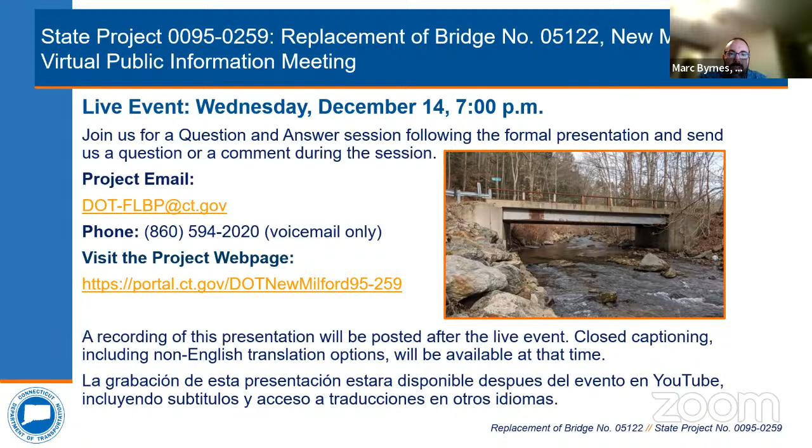The goals for tonight's meeting will be interacting with the project team, explaining the federal local bridge program, design managed by state or DMS program, welcome remarks by the town of New Milford, introductions of the project team, and a formal presentation of the design process, which will explain the condition of the existing bridge, to define the purpose and need, and to recommend a viable proposal. Please keep in mind we're only at 30% design.

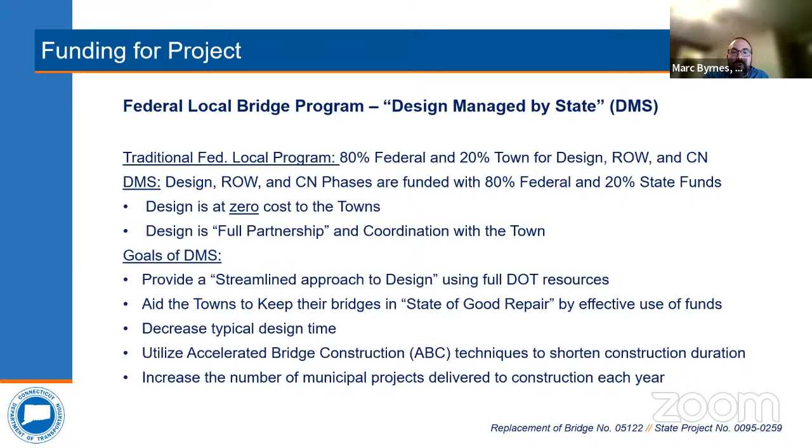We started the DMS program to provide a streamlined approach to design using our DOT resources, which include our consultant liaison engineers and our on-call designers. We also created it to aid the towns to keep their bridges in a state of good repair, to decrease typical project design time from upwards of 5 years to 24 to 36 months, and to utilize accelerated bridge construction techniques to shorten construction duration, and to also increase the number of municipal projects delivered to construction each year.

I'll now take remarks from Jack Healy, Public Works Director and Town Engineer from New Milford. Jack? Good evening. Yes, this is Jack Healy. I'm the Public Works Director for the town of New Milford, and it's a pleasure to be here tonight. This is a program which is very beneficial to the town.

Just as an example, the town has 4 projects currently with the state, either with the 80% funding or the current DMS program. This is one of 3 with the DMS program. We have finished 5 bridges in the last year, and we have 8 bridges in the queue right now to be constructed. So it's important to the town that we're able to use dollars from the federal and state government, and the town doesn't have to fund those dollars.

The Van Car Bridge was recently temporarily repaired due to a safety inspection. We did that with the intention that we knew that this program was coming and we were going to participate in it and completely repair or replace the bridge in the upcoming years. This is a great cooperative effort between DOT and the town. We appreciate their agreeing to do this for us, and we look forward to finishing this project up in the next few years. Thank you, Marc.

Thank you, Jack. I'll now introduce the rest of the project team. On the far left of the screen is Bart Sweeney, our Division Chief of the Bridge Unit. To my left is Derek Lassard, Principal Engineer. To my right is Andrew Shields, the project engineer for DOT. On the bottom portion of the screen is Zachary Garano, right-of-way coordinator. And then from Close Jensen Miller, who is our department liaison and acts as our extension, is Mike Brady, project manager, and Dan Carnein, project engineer.

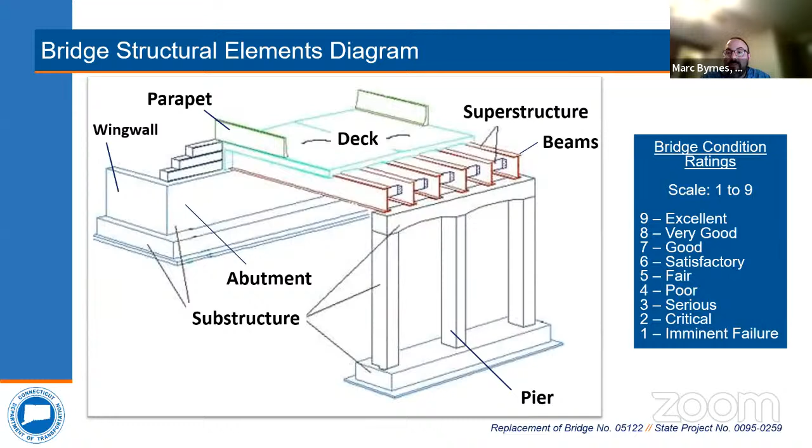Bridge rating conditions rate on a scale of 1 to 9, with 9 being excellent condition and 1 being imminent failure. The department also uses a 0 to recommend full closure of structure. I will now turn it over to Dan Carnein so he can begin the formal presentation. Dan?

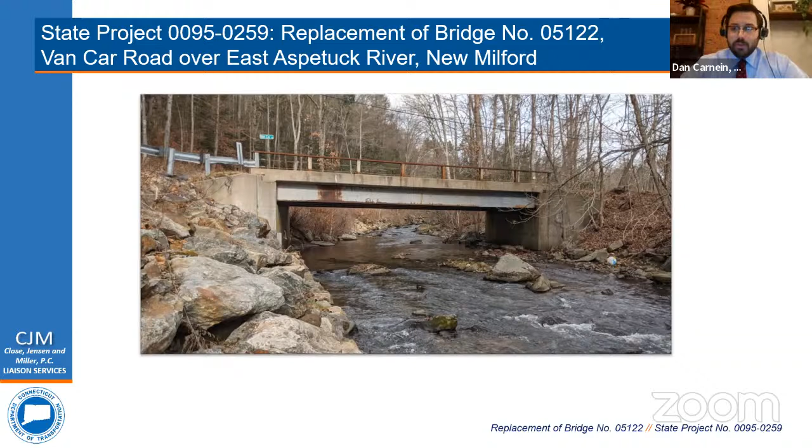Thanks, Marc. So as Marc said, I'm the project engineer for this project from Close Jensen Miller. So I'll be talking to you about the project specific information for project number 95-259, replacement of bridge number 5122. So the bridge carries Van Car Road over the East Aspetuck River in the town of New Milford. The bridge is 0.6 miles west of the intersection with Route 202, and it's adjacent to Paper Mill Road.

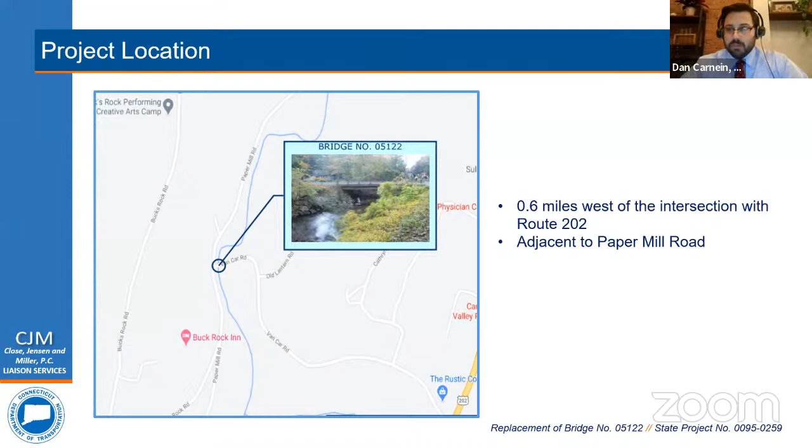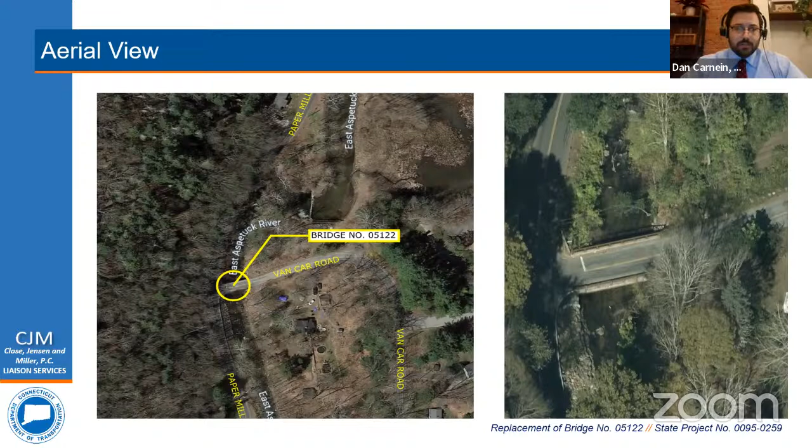The existing bridge itself was built in 1957, and that bridge consists of steel beams, a reinforced concrete deck, and that is supported by reinforced concrete abutments and wing walls. The bridge has a 53-foot total structure length, a 22-foot approximate curb to curb width, and then an average daily traffic of 840 vehicles per day.

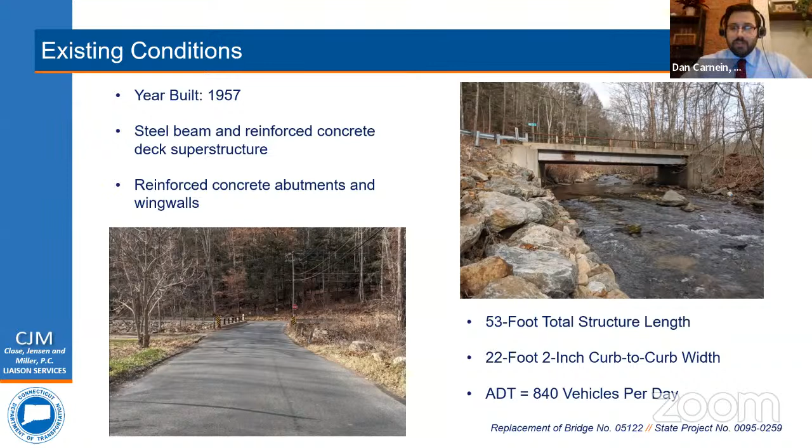There are existing overhead utilities at the site. They currently span the structure on the north side or upstream side of the bridge along Van Car Road, and then they also run along Paper Mill Road to the west. We will be coordinating with utility companies throughout the design process to ensure that there's no disruptions to service throughout the project.

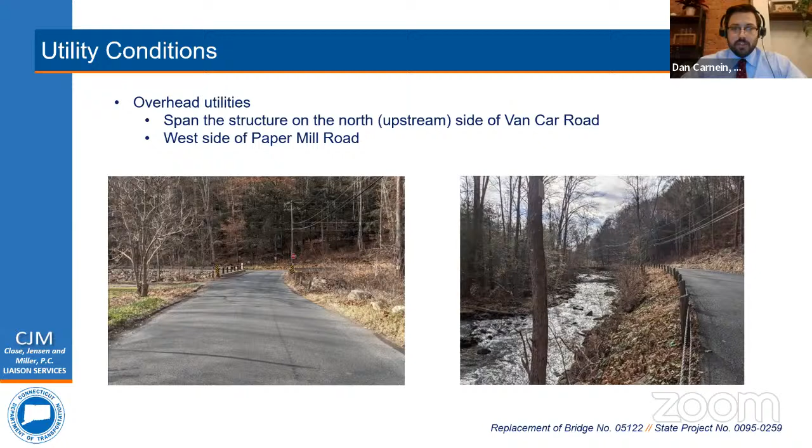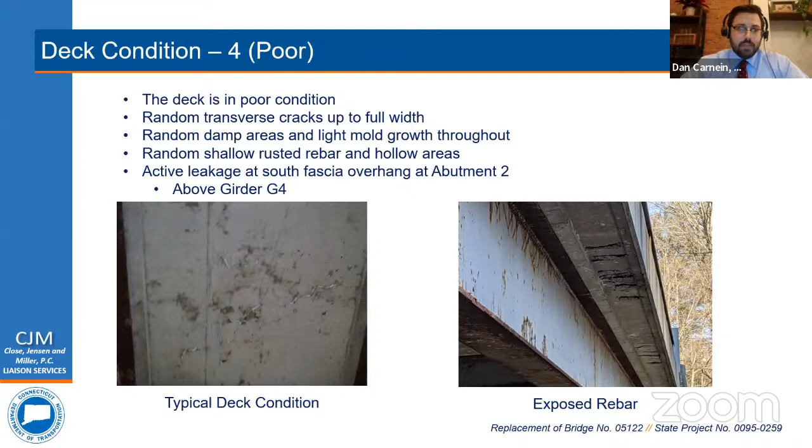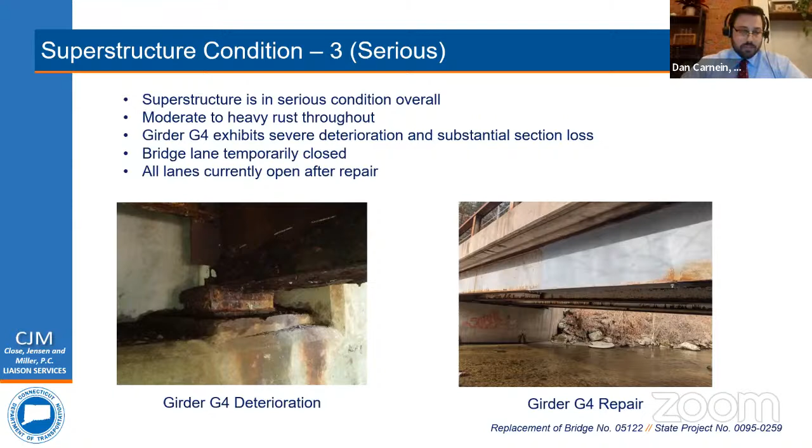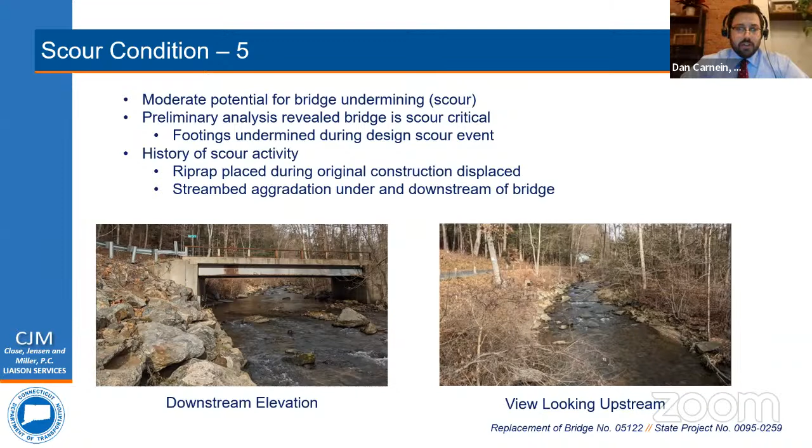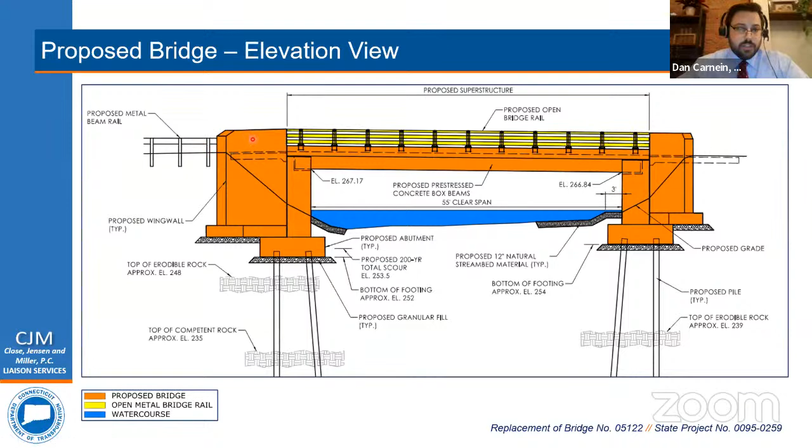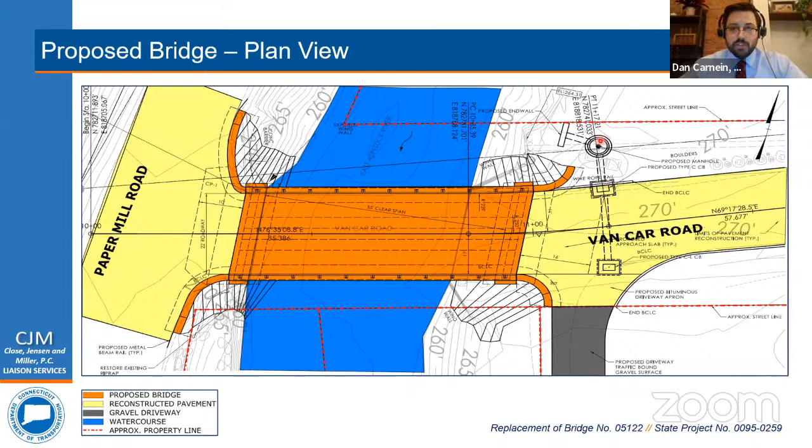As part of this project, we will be slightly widening the bridge structure. So we will be going with a slightly longer clear span of 55 feet for the proposed bridge. As a result, we will need to reconfigure the driveway adjacent to the bridge located at the southeast corner. So portions of that driveway will be reconstructed with new bituminous concrete pavement driveway aprons, along with gravel section. And then lastly, we will improve the drainage at the site by installing new drainage structures, including catch basins, and then tying into an existing drainage system that's already out there today.

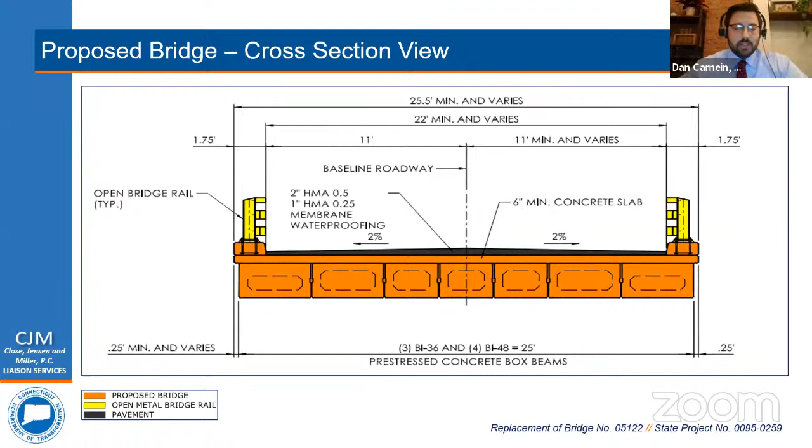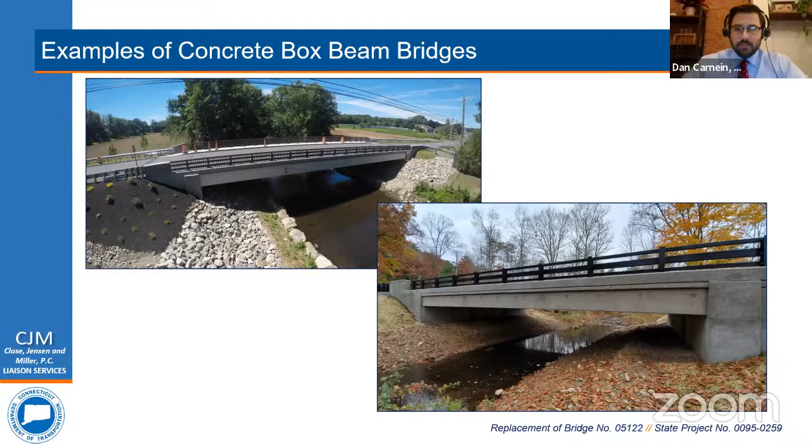Construction for the Van Car Road Bridge, Bridge 5122, will utilize detours and closures of both Van Car and Paper Mill Road. Van Car Road will be closed for one construction season, or approximately 6 to 8 months. And because the bridge is so close to Paper Mill Road, we will have to temporarily close Paper Mill Road to perform construction activities within that intersection. It was determined that these activities should be limited to an approximate 3-month window over the summertime to help limit disruptions to local traffic and buses in the area. The signed detour route could be used by all types of vehicles, trucks, buses, cars, people not familiar with the area. That signed detour route will include Paper Mill Road, Route 202, Elm and Bennitt Street, along with Wellsville Avenue.

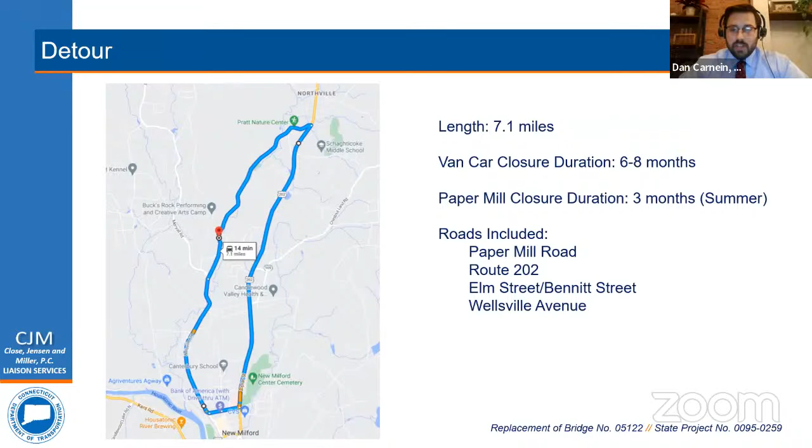We're not proposing any concrete or bridge structures outside of the existing street line. And we also want to keep in mind that these impacts are from preliminary design plans, and that these impacts could change as design progresses. We will go a little bit more in depth on the rights-of-way process. But as design progresses, we will also be coordinating with individual property owners.

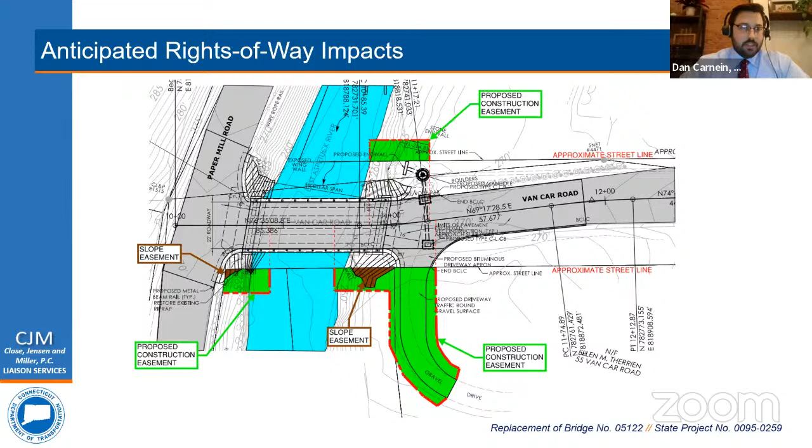For this project, we will be getting all the required environmental permits at the local, state, and federal levels. So we do anticipate a New Milford Inland Wetlands permit, a flood management certification from the state of Connecticut, along with a U.S. Army Corps of Engineers general permit.

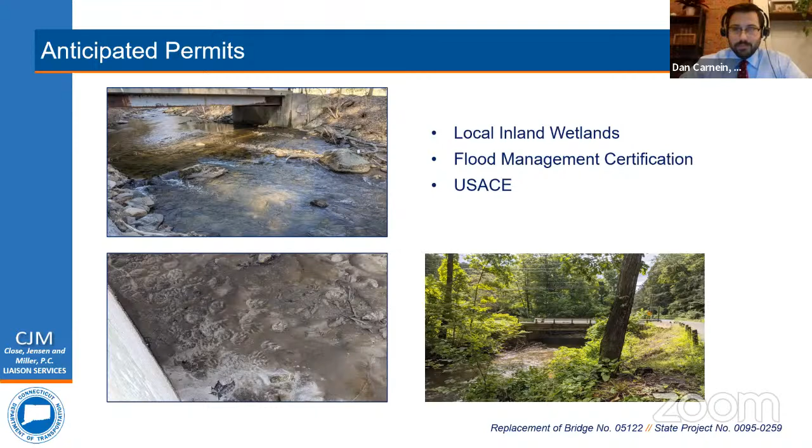Overall, this project will take one construction season, or approximately 6 to 8 months, with an anticipated construction start date of spring 2025. Currently, the estimated cost for this project is $2,955,000, with a state share of $591,000. And again, as Mark and Jack mentioned before, this is one of those design managed by state projects, or DMS projects, where the town share for this project will be $0.

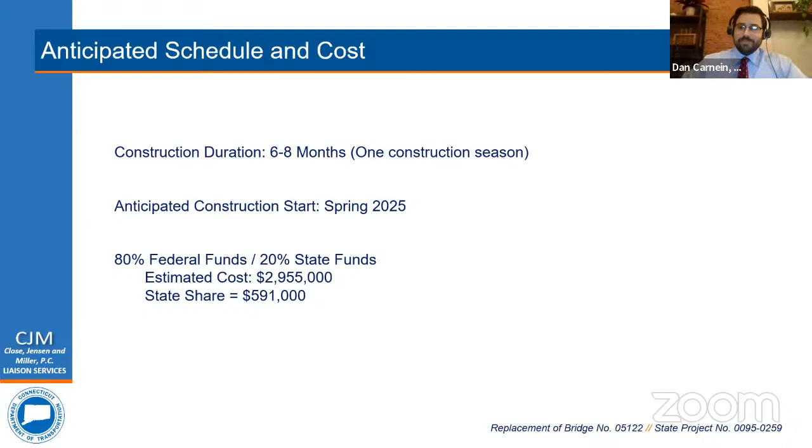So at this time, I'll turn it over to Zach from our team to talk more about the rights of way process. Thanks, Dan. Like Dan mentioned, my name is Zachary Guarino. I'm the project coordinator, Department's Division of Rights of Way. Our office is responsible for acquiring the property rights needed for transportation projects.

Proposed project design requires the acquisition of property rights, like Dan mentioned, so I'd like to give a brief overview of the department's right-of-way acquisition process. Also, like Dan mentioned, the specific impacts are still being finalized, so they may change as the design progresses. Any required property rights will be acquired in accordance with the Connecticut General Statutes, sections 13a-73 and 13a-98e. And since there's federal money used in this project, we'll also be adhering to the Uniform Act.

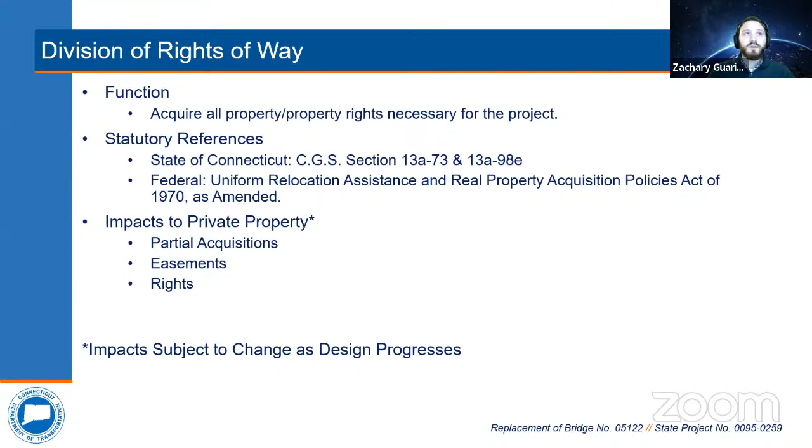Change the slide. Once the design has progressed to a point where we are ready to begin the acquisition process, each affected property owner will receive a formal letter of intent to acquire from our office, along with a property map which depicts the exact property rights to be acquired. On the screen, that's just a sample property map.

At that point, our office will determine the fair market value of those property rights to use that value to establish an offer of just compensation. That offer will be sent out to the property owner in writing, and a right-of-way agent will be available to meet with the owner and explain the project, go over the specific impacts to their property, and explain the state's offer. The property owner will have a reasonable amount of time, typically 30 days, to consider the state's offer and enter into negotiations.

When an agreement is reached, the department will prepare all the necessary paperwork to record the deed and property map on the town land records. However, if agreement cannot be reached, in order to keep on schedule, the department may acquire the necessary property rights through its power of eminent domain. In that event, the state files a notice of condemnation in Superior Court, along with a monetary deposit in the amount of the state's offer.

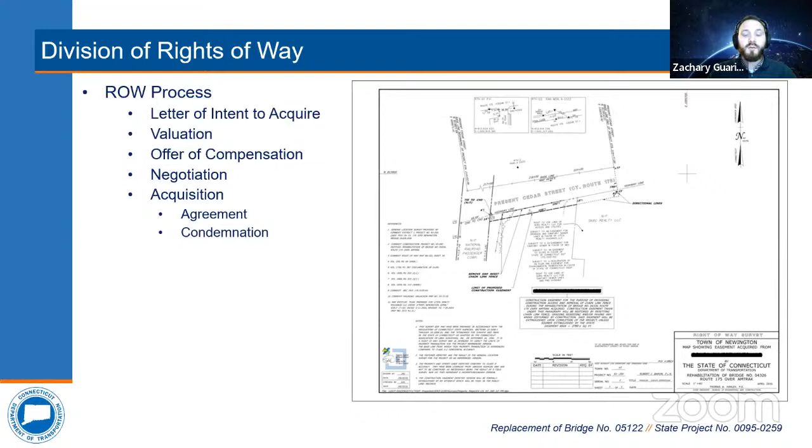The owner would have 6 months from that date to file an appeal if they felt that the state's offer was inadequate. Whether or not the owner chooses to appeal, the money deposited in the court is available to be withdrawn by the owner. It's important to note that the state only acquires property rights that are needed for the project. If there's any questions specifically regarding the right-of-way process, I'd be happy to answer them after the presentation. Thank you, and I'll turn it back over.